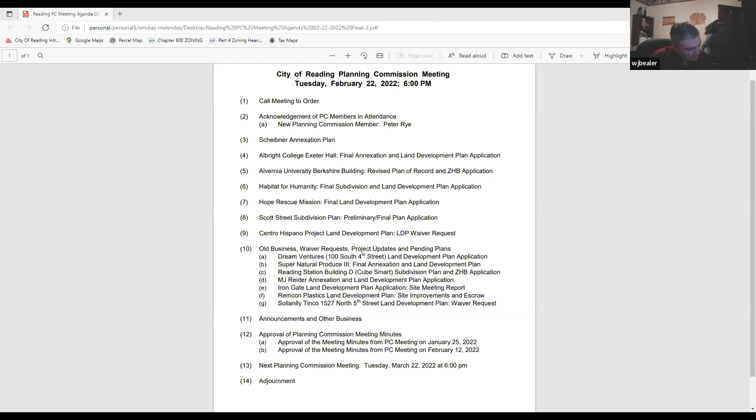All those in favor say aye. Aye, aye, aye. Okay, very good. And opposed? Okay, with that we have an agenda. I would just ask the minutes to reflect that it was amended accordingly, so we have compliance with the Sunshine Act amendment.

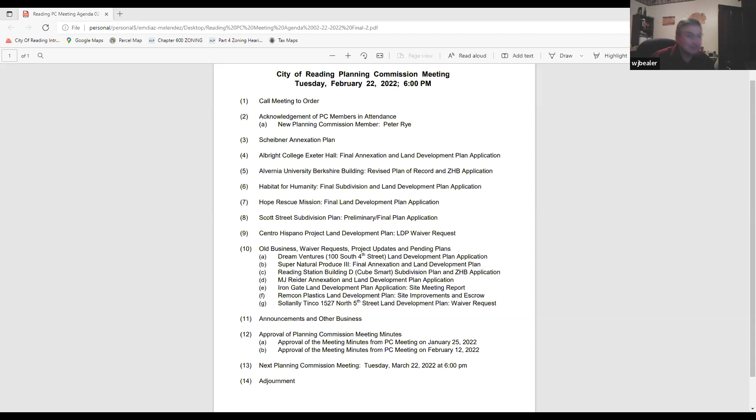Very good. First on our agenda for review is the Scheibner annexation plan, and with that I will turn it over to Jerome. Okay, thank you, Mr. Chairman. The Scheibner annexation plan is an annexation plan. Emily, if we can have that on the screen.

This was a 2-lot or 3-lot development with a 1-family unit which has attached units. The objective of the plan is to combine all 3 lots, and then as part of the building permit phase, to renovate and convert the two-family to a one-family. So the plan will focus on the annexation portion of this project, and the building permit itself will focus on the conversion.

Plan review was done on February 14th. Plan was prepared by John Hoffert Surveyors. You see John Hoffert is here. The plan is rather, again, a simple plan, and it seems like everything is pretty much in order. We just had some comments that would need to be addressed, and some of those already have been addressed, including the Berks County Planning Commission review, as well as the information that was requested from Mr. Hoffert. John, do you want to chime in here?

No. At this point in time, the property is situated along South 17 and a half Street, and it is the consolidation or combination of joining 663, 665, and 669 South 17 and a half Street together. Mr. Scheibner is a vet, and through the VA, they are funding pretty much this project relative to the conversion of what would have been the semi-detached property on 663 and 665 into one overall single-family detached dwelling. It includes not only internal work, but the disconnect of certain outside utilities, such as eliminating one sewer and one water connection to the existing main, which will be done accordingly, according to the utility abandonment of each utility.

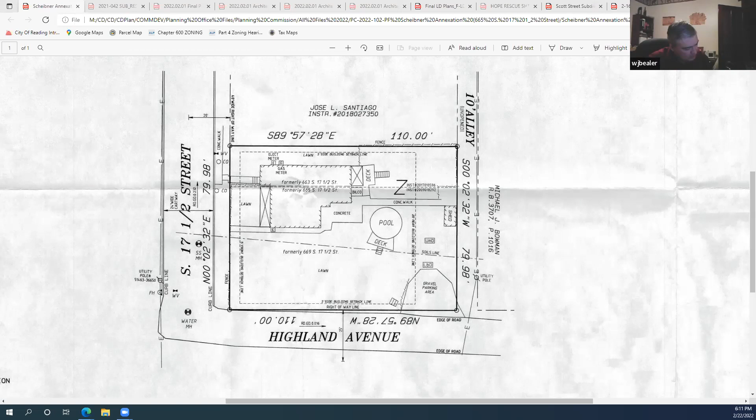Any question on the motion? Okay, all those in favor say aye. Aye, aye, aye. Opposed? Very good, and we are unanimous. Thank you very much, John. Mr. Chairman, thank you very much, I appreciate your efforts on this particular subdivision. Very good, thank you.

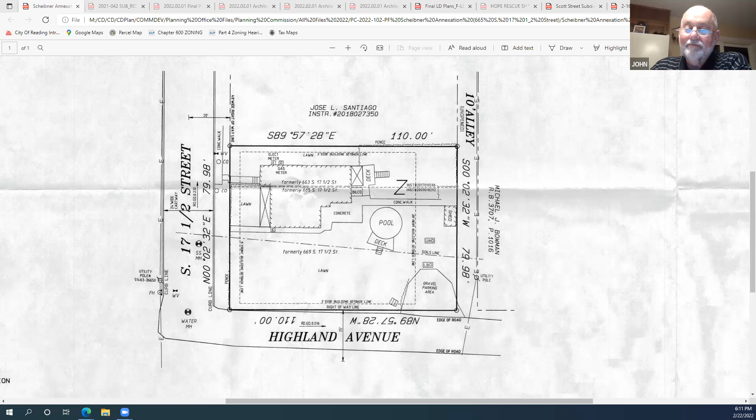We will move on to the review of Albright College Exeter Hall. I will turn this over to Jerome. Okay, thank you Mr. Chairman. This plan has been around for a while, we're at the very end of the process.

As you may recall, you did approve the final plan on January 25th, subject to the applicant complying with the comments in our last review letter. We've gone through the current plan as well as all the documents submitted with it, and just issued an updated review letter dated February 20th, which the applicant is attempting to take care of immediately as well.

Again, this plan was previously approved. I would say the February 20th letter is a status update. The big things being taken care of now are the municipal improvements agreement and the stormwater management agreement. There is a revised plan that has already been submitted for electronic signatures, but we're going to need to go through the plan one last time. There is no action required.

I'm just bringing this up for information purposes. There's been a number of comments back and forth regarding the revised plan, and as I mentioned, we're going to take one last look to make sure everything has been addressed. Within my February 20th review letter there were a few items, and I've gone through those with Bogia Engineering, and I think we're at the very end point. So the next step is we'll notify you once we believe the plan has been revised to comply with the comments issued, and once that happens, you can come in and sign the plans.

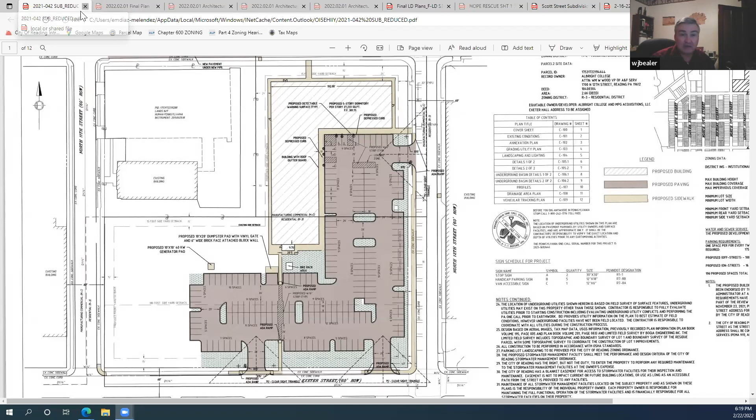And I believe the next plan up is the Alvernia University Berkshire building, and I think that's Greg also. Yes. So I will turn this over to Jerome. Okay. Thank you. This is a revised final plan of record.

The final plan application is in play. We've reviewed the plan that was submitted to us for this month. It was revised by the applicant. Our review letter was issued on February 20th, 2022.

The most critical item on our review letter, and also a procedural matter, is that the applicant will need to go back to the zoning hearing board, in which it's my understanding they've already made application. The reason is because of modifications to the number of apartments or dormitory uses, as well as the population of those units.

In total, right now there are 66 two-bedroom units, 6 studio units, and I believe 7 one-bedroom units, for a total bed count of 145 for the students or persons residing in this location.

They also submitted revised floor plans. The floor plans show that residential occupancy will occur on floors 2 through 8. Floor 2, as we went through last time, was the mezzanine level. Floor 1 will be a commercial or retail use, though it's my understanding that use has not been determined yet. The only conflict is that this may throw a bit of a curveball on the sanitary sewage flows for the project.

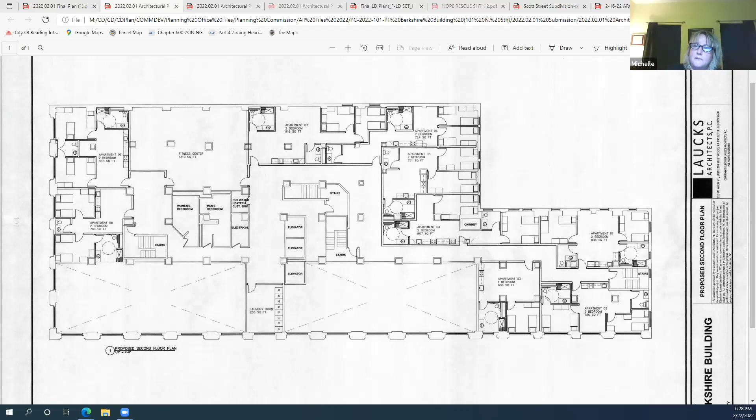Is there any other comment from staff? So this will be a tabled item. Yeah, that's what I was going to suggest.

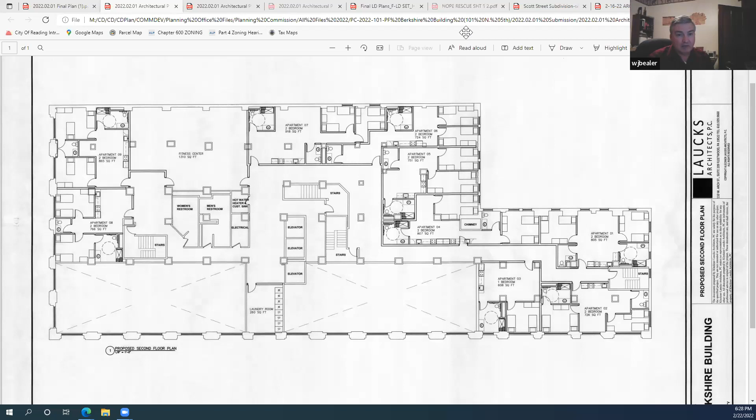Unlike, and I think Shannon will agree, the one plan we entertained at our special meeting before zoning was able to give their ruling because of pressure from the administration. But generally, the Planning Commission does not act until we hear from the zoning hearing board, and see that they don't have any major changes to the plan.

When I first came to the planning commission, we actually had zoning and the planning commission reversed — zoning came first in the month. Then we would see plans, they would go to zoning, get totally changed, and have to come back to us. It was just a total mess. So I'd rather see this go through zoning, let them do their thing, and then we can consider this for action.

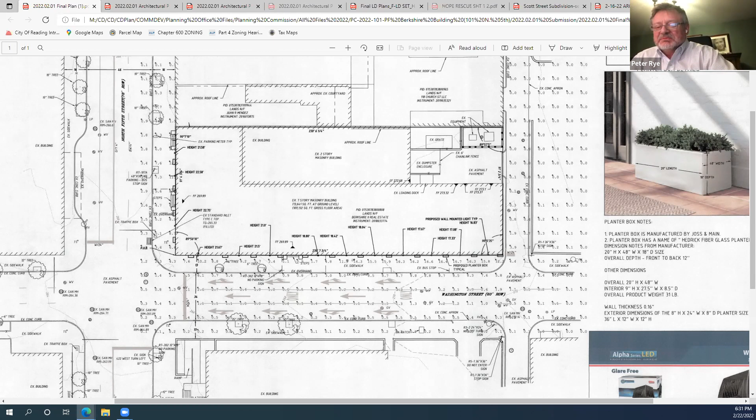Yeah, so I just wanted to review that again, and also let Peter know how certain things have come about and why we do certain things that we do. Appreciate that. And any words of wisdom or understanding along the way are appreciated.

Very good. And with that, do I hear a motion to table the plan?

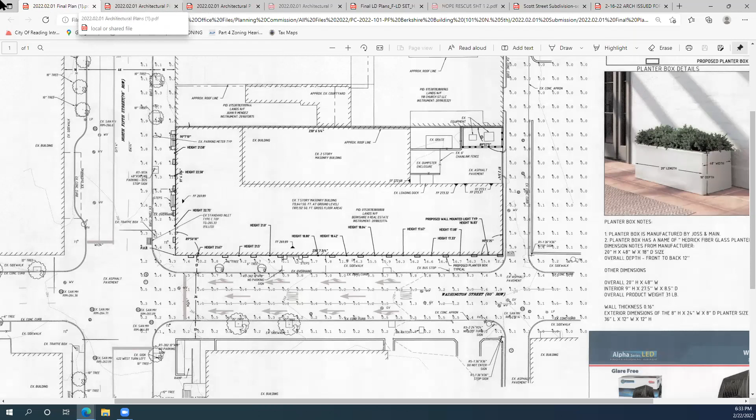Okay, next on the list, we have the Habitat for Humanity final subdivision and land development plan at the Buttonwood Gateway.

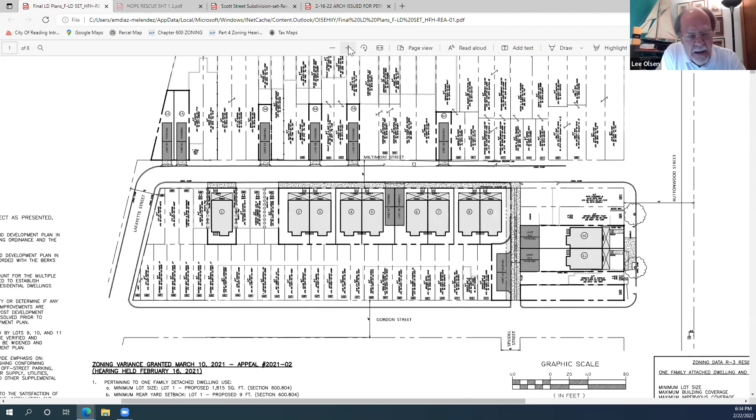Mr. Chairman, this is Lee Olsen. I would like to, for the sake of transparency, announce full disclosure that my firm is the architect of record for the Miltimore project for Habitat, and therefore I shall recuse myself from any commentary and abstain from any voting. So I will turn off my microphone now. Okay, thank you, Lee.

And I'll turn this over to Jerome. Okay, thank you. This plan has been around for some time. The final plan was approved by the Planning Commission. It's gone through reaffirmation a few times. The applicant has submitted a plan reaffirmation request for this project as well. But it appears that we're at the end of the line for this project in terms of compliance.

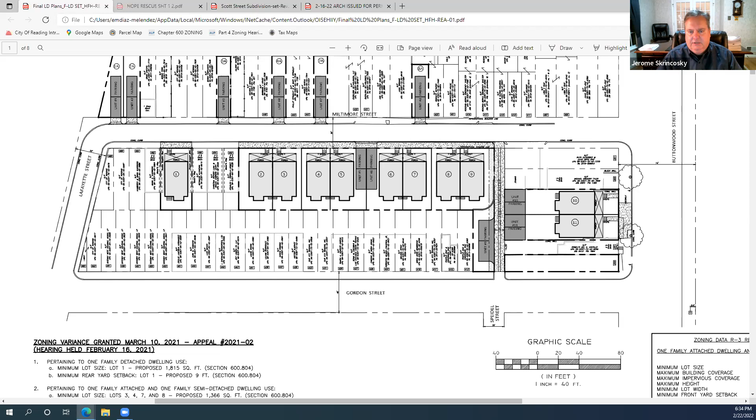The applicant has submitted the stormwater management agreements for each individual lot on the tract, since the stormwater management is not going to be covered over one area, but over multiple areas. So the stormwater management agreements have been submitted for that.

The applicant has also asked for a waiver of section 515.309 and 515.601.B of the subdivision and land development ordinance, which is in regards to improvements agreements and performance guarantees. I'll let the applicant make that official request, and then Michelle can comment on that.

Chuck, are you here? This is Larry Grabowski with C2C Design Group. I'm filling in for Chuck. Okay.

And we have a letter that we submitted on behalf of the applicant to get waivers of section 515.309 for the performance maintenance guarantee and section 515.601.B for submission of improvements agreements.

Give me one minute, there's a train in the background.

While the train's going in the background, the reason why the plan reaffirmation request has been submitted was because the 90-day time clock will be expiring today.

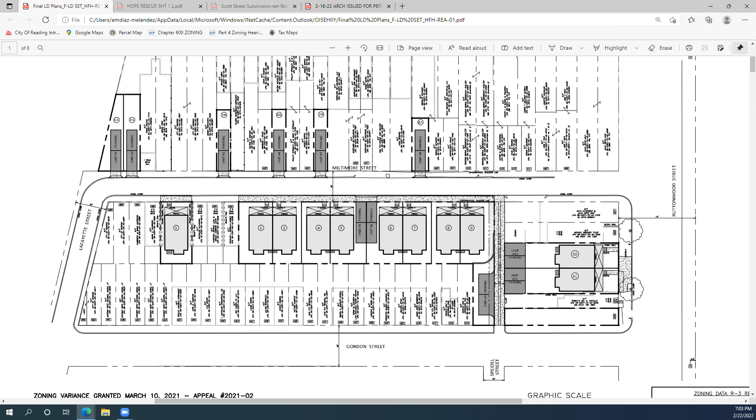I did hear you, Will, but it's okay, let him do it. Get into the minutes for the first time, that's good. And then that way we don't have to put a number on things.

And then that would also still require a guarantee from Habitat for Humanity on the other units. Mr. Chairman, does this also include the reaffirmation of the project? No, this is just the recommendation to council. Okay.

Any other questions on the motion? Okay, hearing none. All those in favor, say aye. Aye. Aye. Opposed? Okay, very good, and we have one abstention, of course. Lee abstains. Very good.

Okay, are there any other comments on this plan before we ask for the vote of the reaffirmation? This is just a minor thing. This is Bob Conklin. Is this a revised plan that we're looking at, or is this still the plan of 2021? 2021, and it appears you approved the plan.

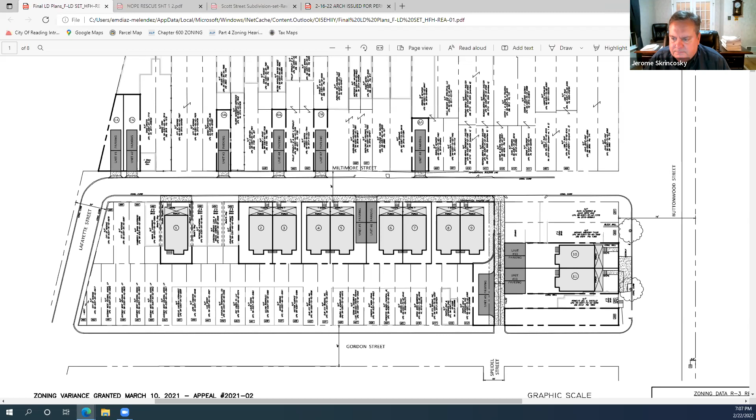And with that, do I hear a motion to... one more clarification. This is a reaffirmation because this plan has not been recorded yet? Correct. Okay.

With that, do I hear a motion to reaffirm the plan for Habitat for Humanity, the Miltimore Street revitalization at the Buttonwood Gateway? This is Bob Conklin, I'd like to make a motion to make a reaffirmation of the plan. And a Mr. second?

Yes, Michelle? I would just say, Jerome, there was discussions about some conditions on the reaffirmation that I believe included in part requiring an improvements agreement. Yeah, and I think we took care of those in the previous recommendation. Oh, I thought it was my understanding that the prior motion was only as to the financial guarantee, not the agreement itself. That is correct. This motion includes the 4 or 5 things that Jerome had noted, including the need for at least a minimal improvements agreement, and there were a few other conditions. Thank you, I just wanted to clarify.

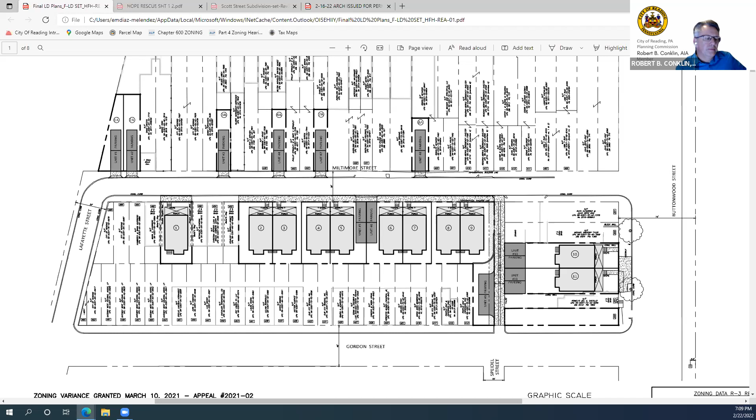Okay, hearing none. All those in favor of the motion, say aye. Aye. Aye. Opposed? Okay, and then, of course, we have the one abstention. Very good, we have a reaffirmed plan and recommendation to council. And I think we're clear that an improvements agreement will be needed once all the engineers have their little powwow.

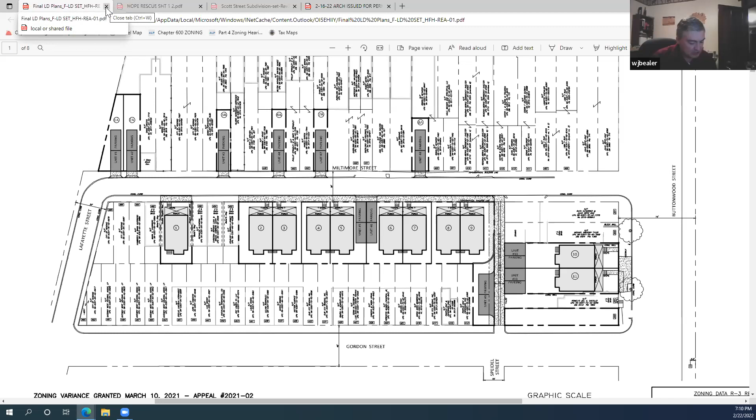Thank you. Next thing on our agenda... oh no, I'm sorry, I skipped one. The Hope Rescue Mission plan, the final land development plan for the Hope Rescue Mission. I'll turn this over to Jerome.

Okay, great. This is another plan we haven't seen in a while. It has been submitted as a revised final plan. There are some issues that still need to be resolved. The applicant has taken care of some of those from the previous application that was submitted and reviewed. As you're aware, this plan did receive zoning hearing board approval back on July 10th, 2019. They've also received accessory use building permits associated with the site.

Moving on, the issues that still need to be resolved on the plan include financial security, some notes to be added to the plan regarding vision obstruction. The curbs and sidewalks were previously determined to be in fair condition, and we asked Public Works to verify that and determine if they would like to see the curbs and sidewalks included within the municipal improvements agreement.

The plans were previously submitted for the stormwater management review to Public Works for review and consideration. The erosion and sedimentation control was submitted to the County Conservation District. Public Works Department should verify if the stormwater management plan and agreement are satisfactory. I do not think the applicant has submitted a stormwater management agreement as of yet. Other than that, the other items on here are for cleanup. The plan has been reviewed by the Berks County Planning Commission.

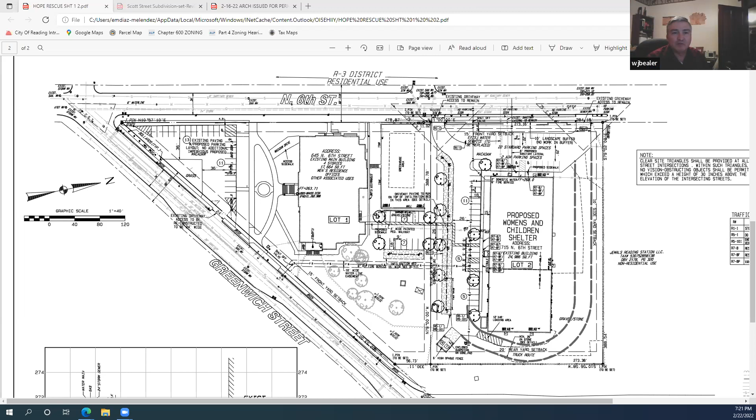Very good. Tom can move ahead with this, and then hopefully they can start this soon. It's going to be an exciting project. Thank you. Okay.

Next on the list is, now we will talk about the Scott Street subdivision plan, and I'll turn this over to Jerome. Thank you, Mr. Chairman. This is the plan you saw last year as well. This would be revision number 2 to the project. Our review letter is dated February 19th, 2022.

As you may recall, this is 2 separate lots located along Scott Street. They will each be subdivided to include 2 unit developments, which are semi-detached units on both of the lots. So there'll be a total of 4 units, 2 on each lot. You see the proposal that has been submitted. There are some still outstanding issues that we need to resolve. The applicant has resolved a lot of the other ones that were previously issued.

Let's start with the first one, which Shannon will have to probably bring her in. This is with regards to the sidewalks. Sidewalks were previously waived, and that was part of the subdivision land development plan requirements. However, section 600-1505 of the zoning ordinance still applies. And I asked Shannon to take a look at this and review some of Dave Paris's notes and provide her opinion, since she is the zoning administrator.

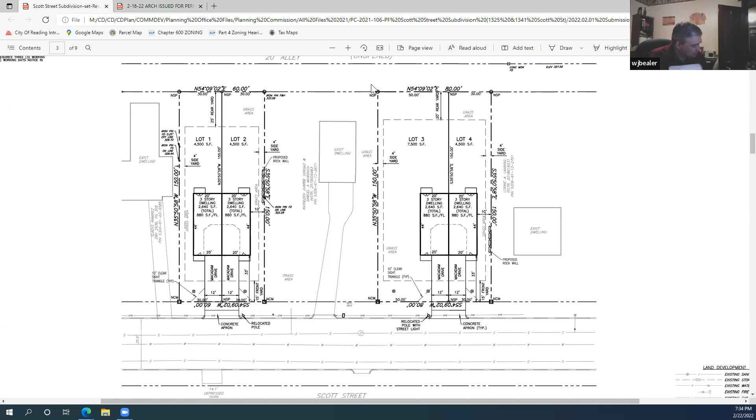All right, and now we are going on to the Centro Hispano project. They are asking for a land development plan waiver.

Mr. Chairman, this is Lee Olsen again. I need to, in full disclosure and full transparency, inform the Planning Commission that my firm is the architect of record for the project. So I will recuse myself from any conversation and abstain from any voting. I will mute my microphone and turn off my video. Okay, thank you, Lee.

And I'll turn it over to Jerome. Okay, thank you. Centro Hispano is looking to relocate their facilities from 5th and Washington Street to 2nd and Washington Streets. They will be doing some other things as far as community services within the city of Reading. I'd like to introduce Mike Toledo to give an explanation or expand upon what the intent of the uses are and the areas they plan on occupying within this new facility at 2nd and Washington. And when I say new facility, it's an existing building located at 2nd and Washington.

Thank you, Jerome. Good evening, everyone. Centro Hispano has served our greater Reading community for over 55 years. It's the primary agency that supports the growing population, with many needs addressed through collaborative initiatives designed to enable individuals and families to improve their quality of life. Every day, the Hispanic Center's core programs serve about 1,800 members of our community whose access to existing resources is either restricted or curtailed by language, cultural barriers, lack of information, or lack of transportation. Centro Hispano serves as a cultural and linguistic intermediary for many organizations and government agencies in our community, whose own services to the Latino community and the region as a whole would be adversely affected by the loss of Centro Hispano's assistance and coordination. Our central goal is to focus our programs and engage and strengthen families from toddlers to our senior citizens.

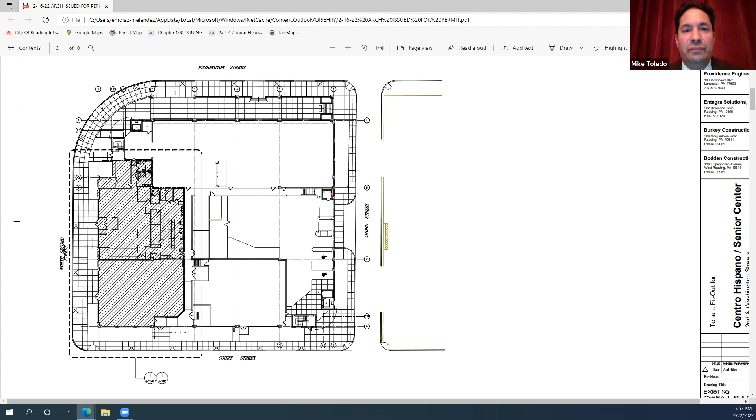Are there any site improvements, any at all? No. Because as I read it, it says any change of use will require minimal site improvements for it to be a minor land development plan. So if there are no site improvements, no building addition, I think that language qualifies the change of use. I don't think this qualifies as a minor land development plan that requires any action by this commission.

Okay, we'll note that on the record, and Mike, then I would say your next step is for the zoning permit and building permit. Well, again, thank you for the time and the direction. Much appreciate the work that you all do. Well, thank you, Mike, and good luck with this project.

Let's remember, make a note of that, and this was not the staff's fault, and normally I would say it's the applicant's fault, but it sounds like this was some oversight, maybe on our part, or whoever's it was, when the amendment was changed, that there does not seem to be a provision for an application or a waiver, should one have been needed. So let's make a note about that and revisit possibly making a recommendation in the future, so we don't have that situation again.

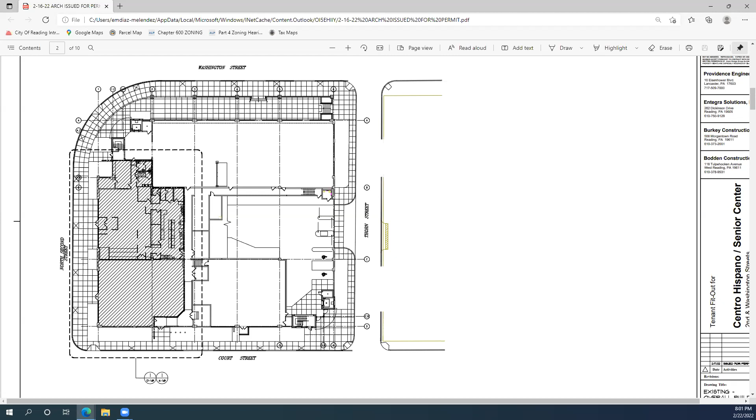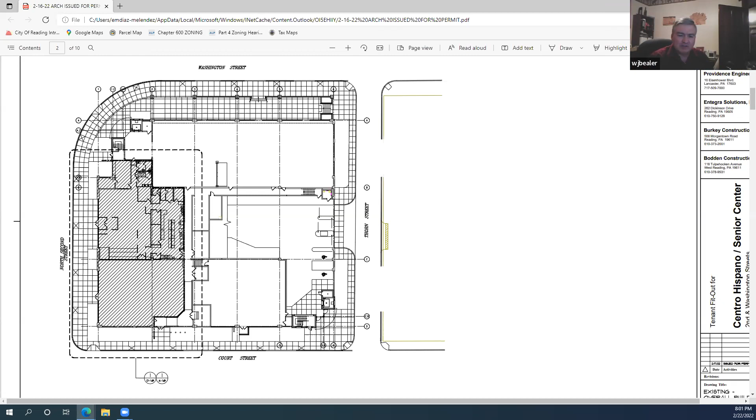Very good. With that, let me see who's here yet. We have a few guests here. Do I have the wrong agenda? We're up to number 9, correct? We're up to number 10. Okay, with the old business waiver requests, yes, that kind of good stuff. Okay, very good.

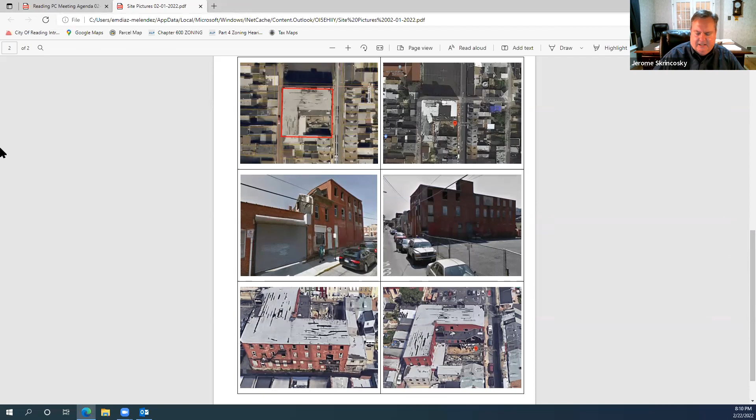As you can see from these photographs, some were taken along Moss Street, and some give you an overall perspective of the property. What we thought was the best option—if you can slide down to the next set of pictures. Oh, okay, that one, yeah, that's good.

You'll notice that there is an alley along the north side of the property. We concluded that it would be the best option for site accessibility, considering that this building is going to be torn down, that the use of the alley in conjunction with the new development would work well.

Mark, you're being echoed. I'm in a silent room here. I don't know. Can you mute for now? Okay.

Going back to it, our ordinance specifies under section 600-1602B that the use of an alley be used for site accessibility and off-street parking where it's available. And in this situation, it is available. We believe that there would be no on-street parking spaces lost along Moss Street, and I think that's very valuable. If anything, we may be able to gain a space, and then the alley would need to be widened to approximately 22 feet, which could be done by easement or by dedication.

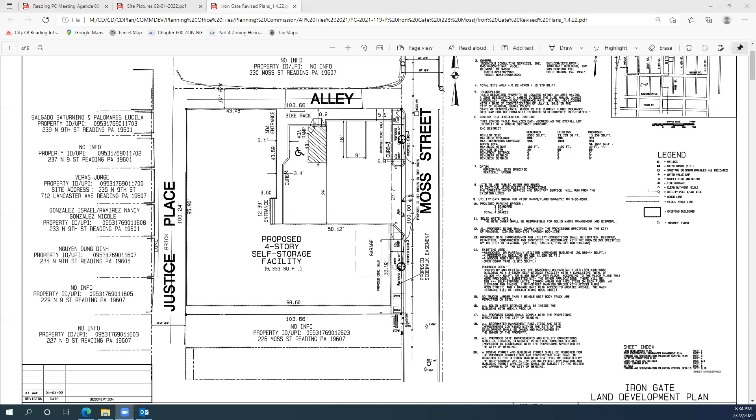I just wanted to mention one other thing, and I'm not 100% positive, but it seems to me that even if we went down to the alley using that as an access point, the truck turning radius isn't really helping as much. And if it's helping you get in, it's not going to help you get out because there's only a certain amount of space down there. So I'm not really seeing that the use of the alley as an entry point into this building is going to be more of a benefit. So you're going to have the same problem with your present design.

What you see on the screen now is your present design, and the parking that's going to be lost is going to be more than one space. Just to look at the way the trucks were going in and out of this facility - currently, at the overhead door, there's the space, the curb cut, and then there's 10 feet of yellow that people are not supposed to park on anyway. So right there, that's got to be 35 feet plus, maybe 35, somewhere around there. At least I'm not exactly sure.

Mark from Iron Gate should have actually gotten that measurement, but if I can jump in, we do have that measurement. So right now, from the existing curb cut heading south on Moss, you have 18 feet of the actual curb, but of course 5 of that you can't park on - you're not supposed to park on, put it that way - plus the radius. In the proposed plan, from the new driveway, there's actually 38 feet. So we actually increase the parking that's available, on the south side of the building frontage. We take parking that's at Moss and the alley and transfer it down away from the alley, so I think that parking actually becomes better.

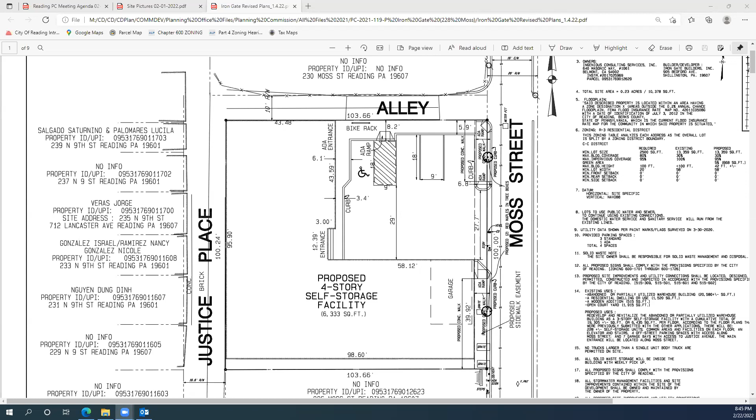I don't know. Well, this is Mark with Iron Gate, and respectfully, we're not looking to lose or gain. The mathematical formula for the building and the property to perform is based on the square footage and building height we've proposed—it has to be somewhere within the realm of what we proposed. Losing 12 feet, if we reconfigure and end up with similar square footage, close to what we proposed, it's just a matter of redesigning the building. If I end up with the same square footage and can give Mr. Merriweather the building with the same square footage, and he ends up with the same number of units, that's one thing.

But if it's a burden we put on him and he has to widen an alley—does anybody have a feasibility study on what it's going to cost to bear the burden of widening the alley? Does anybody know what that costs? What's the cost for putting in the 27-foot access?

Again, we're not asking for a widening of the alley. The widening would simply be on the private property. They did this at the Dollar General I mentioned before—there was no taking, no giving of an alley. It's just that you build part of your access and entrance next to the alley, and use the balance of the alley as the width of your driveway.

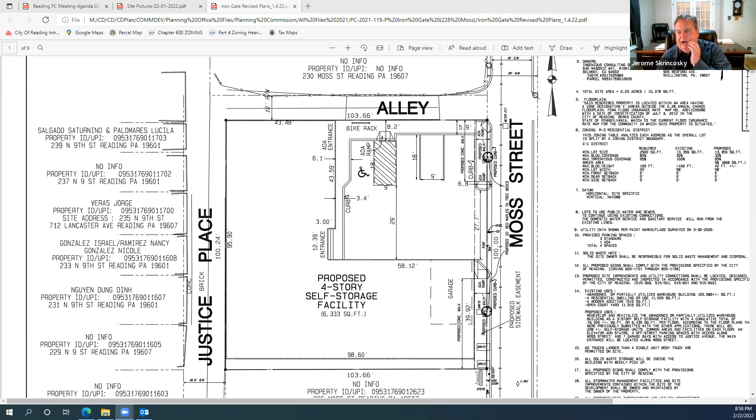Tim, I don't think we were talking about widening the parking lot beyond the building footprint. No, but if we're coming out at the alley, if you see my architectural sketches, I have guardrail along the alley because I have the parking lot built up. I wasn't coming out on the alley because of how grade falls off.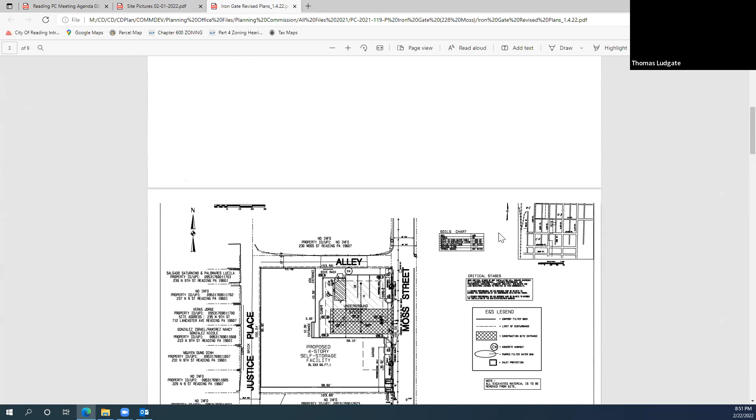Yeah, there's a grade issue, which is why it goes back to part of that Moss Street access, you avoid the grade issue associated with using the alley. That's right, that's why I didn't come out on the alley. I have guardrail there because of my ADA. I have ADA access on the right corner of the building and at the center point of the building.

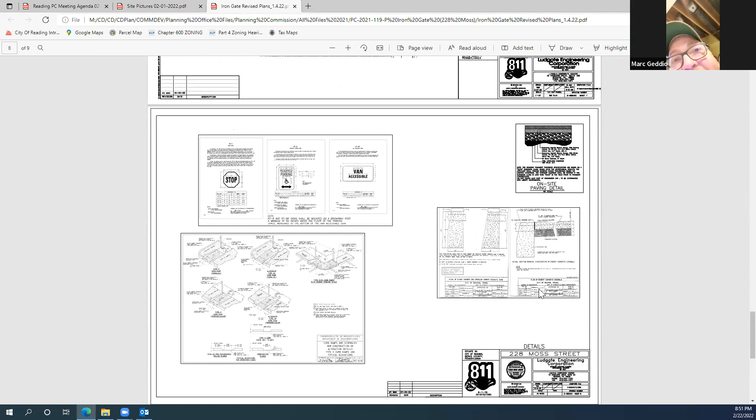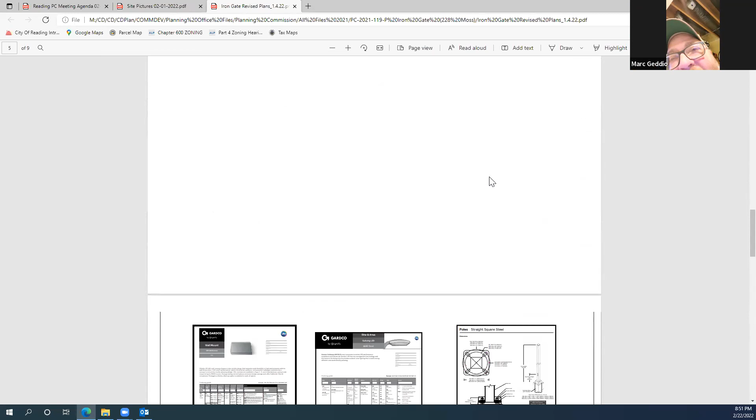And I have ramps that ramp up into the building. I don't have the architect book, but I have my grade level with Moss Street. The deeper you go into the alley, and you see those garage doors on the lower level, I have almost 5 feet of fall from Moss to the back alley. So that's why I didn't propose coming out on the alley, because I can't get my ADA clients into the building if I drop it 5 feet.

Or else I'd have ramps for days. Yeah, you can see in the site plan the parking lot has more of an offset to the alley than the building, north and south, to somewhat take into account that grade.

What's the difference there, Tom? Off the top of my head I couldn't tell you, Jerome, but it's probably 2 feet or something. But to Marc's point, by the time you get down to Justice Place it's probably closer to 5. Halfway down the alley you're about 4.5 feet. Again, off the top of my head I couldn't say, but that's why we have that offset, Jerome, from the parking spaces to the alley.

And I don't think we were asking you to widen the alley all the way down to Justice. We were just talking about what's needed to gain site accessibility into your property. Yeah, so I had sidewalk and guardrail bordering the alley halfway down towards the front corner entrance to our building.

And we opened up that whole corner there to let the property breathe a little bit, so it wasn't so closed off the way it is right now.

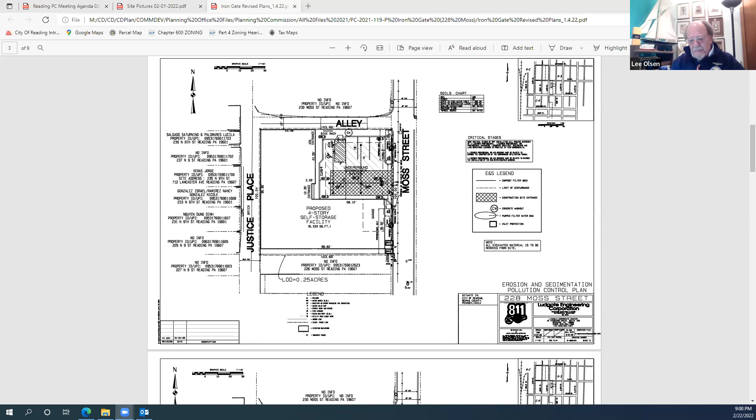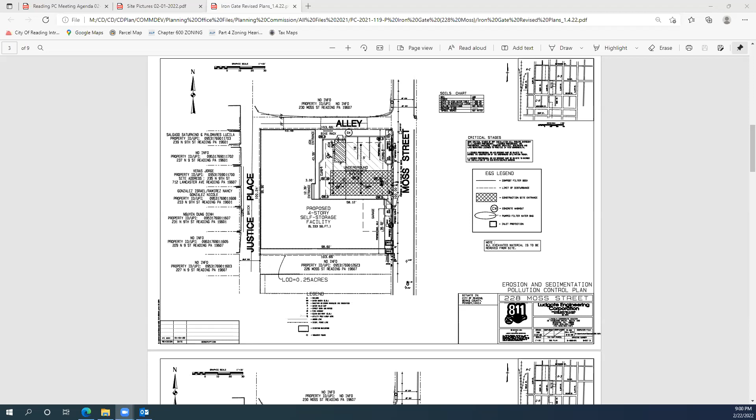Mr. Chairman, this is Will. I have a question for our counsel. We have this interpretation from Public Works and zoning. It makes sense to me, but I'd like to hear our counsel's interpretation that indeed planning does have purview in this regard, and what action would it be, a waiver or what? Well, I have to be honest, this is the first time I've heard this discussion tonight, so I would ask for time to take a closer look at it.

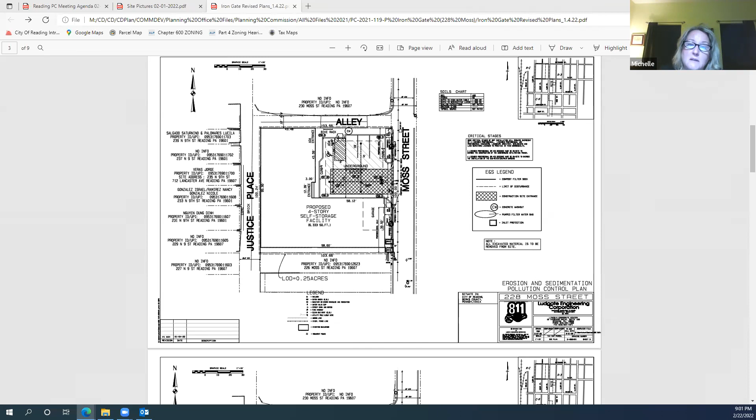My suggestion, piggybacking on what Michelle said, not being a design professional, and it's my understanding the applicant was not present at the site meeting, would it be beneficial, and I don't want to take up Tom and Jerome's additional time, for everybody to do a site visit for a more visual sense of what's being discussed, and that the applicant would confirm their attendance, or at least allow their consultants to be there?

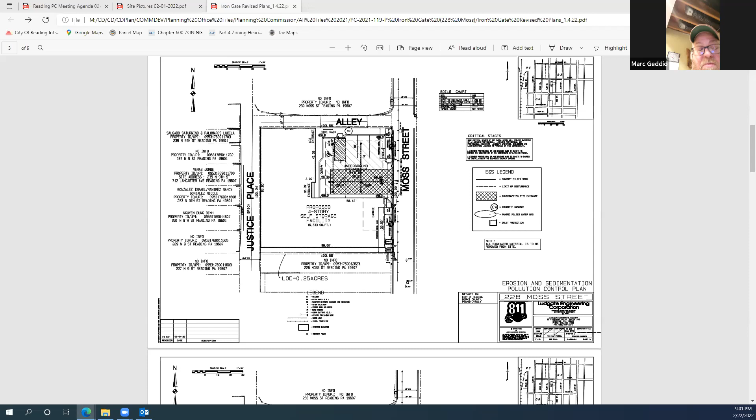This is Marc with Iron Gate. I need to comment because this is the fourth time I've heard I was not at the meeting. I was never invited to a meeting. I do not have a formal invite to that meeting. So if it wasn't circulated amongst my team, I certainly apologize for not being at the meeting. I did not know there was a meeting. I wasn't at the meeting.

I will be at every single meeting as long as I'm included in the invite to all future meetings. I welcome a workshop meeting, and hopefully a resolve and possibly an approval next month, as long as my team and my developer are in favor of that. As long as the squares match the numbers at the end of the conversation, I can fix all of this. I welcome it and I'm open to it. And like everybody on the phone, my ADD kicks in about 12 minutes, so we're long in the tooth with the conversation.

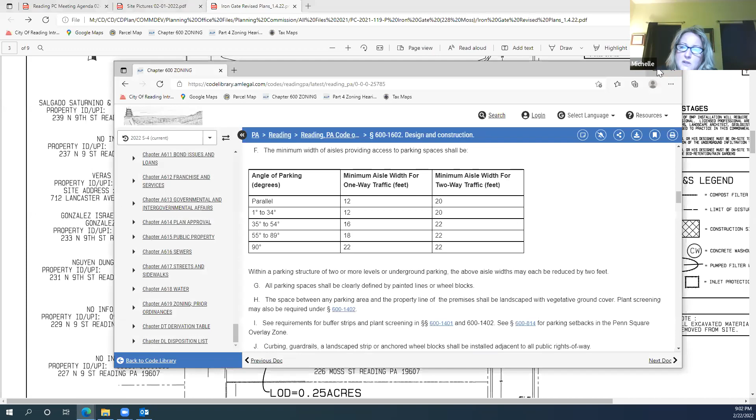I agree that 45 minutes is way long. I'm open to whatever has to happen to get us to the promised land, so whatever has to happen, make it happen. I think it has to be another site meeting. If we can do that, in the interim I will look at the language that was brought up, though I really don't want to take a quick look at it, as we said we're 45 minutes into this discussion.

Since Mark is willing to do the site meeting, and I believe Jerome is also willing, so he can be a little more detailed showing what we're talking about, I think that might be a good way forward, and we could still have that on the table for next month. I agree. I would say myself and Tim would be the only ones that need to be there from the city, unless a planning commission member wants to accompany us, that's fine.

This is Lee Olson. I would like to, depending on when you set that up, make myself available to look at it through an architect's eyes and just see what the problems are and help solve the problem.

We could actually have up to 3 planning commission members. Well, let's stick with 2, just because we only have a membership of 6 at the moment. I understand where you're going with 3, but I would prefer to stay at 2. Okay.

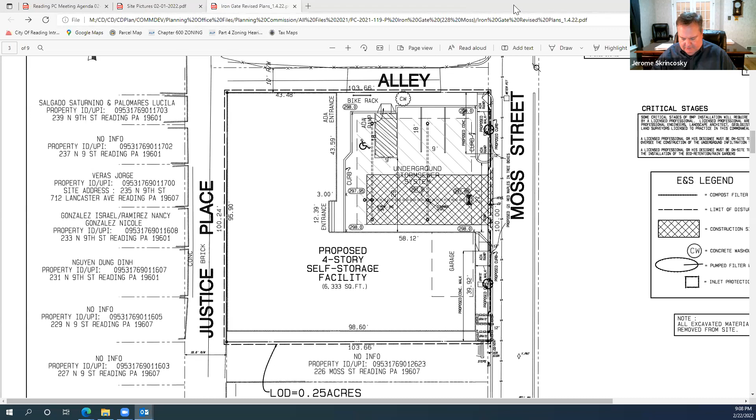Remcon Plastics is a plan that was previously submitted last year. It did receive final plan approval, subject to the municipal improvements agreement and stormwater management agreement. The applicant has provided us with an updated plan, the same plan, and also cost estimates. We reviewed the cost estimates and noticed the 10% contingency needed to be added, as well as the 5% administrative fee. We sent that back to the applicant, along with the need for the municipal improvements agreement and stormwater management agreement, which would be necessary.

Mark Cook is the counsel. Mark, are you still here? Still here, Jerome, and members of the commission, good evening again. How are you? Doing great. And the other wonderful thing, right?

And the other thing that's necessary is, regardless of what the decision is on the project, we need a reaffirmation of approval on this plan, which was granted by the developer.

Mark, it's Michelle Mayfield - can you make sure I get to see those agreements? I don't know if they've come across my desk or not. I know there was some discussion about numbers today. They did not come across your desk yet, Michelle. If Tim is still on, Tim, could I ask you to get me the amount of the stormwater escrow, or where I can find that amount, please?

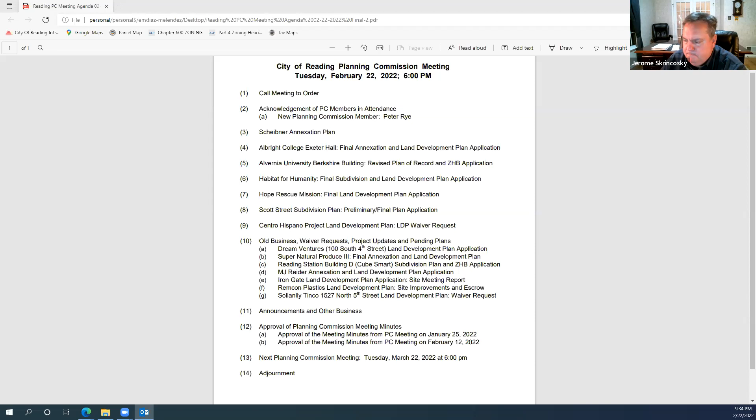Wondering if that might be difficult, because you're going to different locations. Yeah, I think, Mr. Chairman, that of course it would be advertised as a workshop, however that's legally phrased, and there wouldn't be any votes taken, even considered or debated.

So there probably wouldn't be an immediate need for counsel's availability at that point, or a stand-in or anything—we could always have our questions submitted in the meantime, or ahead of time. It's just if you were desiring me to be there, that's something to consider. Yeah, because we would be doing sketch plans and things like that, that was the idea. So we would—because we don't take action on those—but if a question arose, we could just submit the question in the meantime then, correct, yeah.